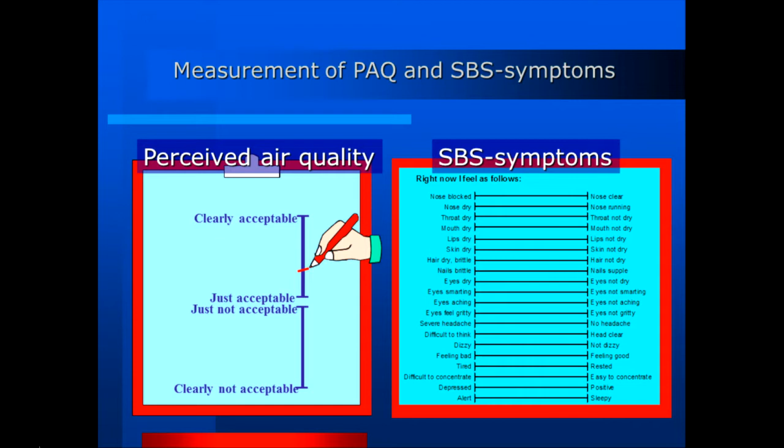These are not measurements, except that we measure their response in millimeters on a scale, but they are a response, it's behavior, and they are not normally distributed. For example, if you have a headache, you may have a severe headache or you may have no headache, but we want to know where you are on the scale, and it's not normally distributed. Most people, fortunately, have no headache, so on the frequency diagram we have a lot of people with no headache, very few unfortunate people out here with a severe headache, and in between something like this. It's called a J distribution statistically, and of course you can't use normal statistics based on the normal distribution.

So we use non-parametric statistics, which do not make that assumption, in order to analyze whether the way those scales were marked under condition A differ from the way they were marked under condition B. We are interested in whether there was a significant difference and in what direction it was, but the size of the difference is of course not of particular interest.

Our main focus is on the performance of typical office tasks, because it's difficult to quantify symptoms in money. And money is required in order to improve the indoor environment. It costs money to build a better place. It costs money to bring in more outside air and to control the temperature more exactly. And that money has to come from somewhere.

And if we can show, as we have over and over again, that people work less well in poor environments, then the money comes from the improvement in productivity. In fact, since providing a good indoor environment usually costs about 1% of wage costs of having people actually present doing work, then a 1% improvement in productivity would pay for doubling the budget for providing a good indoor environment.

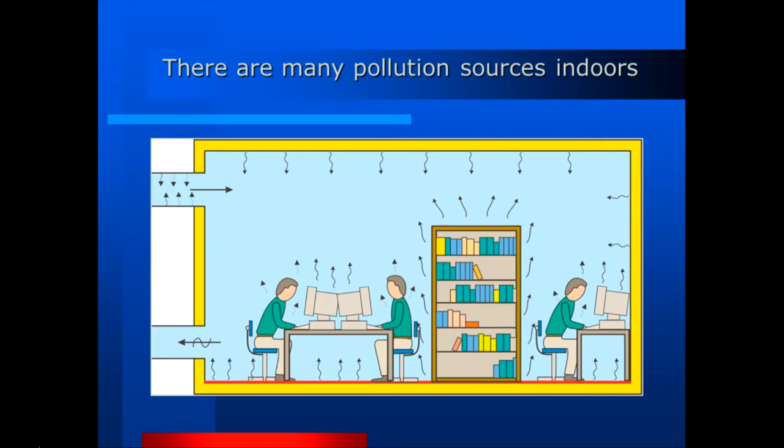We have also indicated that there are pollution sources in the supply system for the air. That's not clean air that comes in there. It was clean before it was taken into the processing, but there's usually a filter there. The purpose of a filter from the point of view of an engineer is to keep his equipment clean. But I've always told people that if you want to breathe clean air, you don't put your face into a vacuum cleaner bag, because that's where the dust is. And yet, all the air that we are breathing indoors has come through such a bag that collects dust. And it does amount to a fair source of pollution.

And therefore, you get something for changing the filter. You get cleaner air. And in this series of experiments, we evaluated how much that means for office work.

In this field laboratory, we had a screen across about a quarter of the floor area, and behind that we could insert various sources of pollution. On a typical control day, there would be nothing behind the screen, but a certain amount, 10 liters per second per person, of fresh air coming in directly through the wall. It hasn't even been through a filter or through the building's ventilation system, so we know it's clean.

On other days, there would be office items behind the screen. The most usual item is an old carpet that has absorbed all of the chemicals that were in an office for a dozen years, and we hang that up in strips. The area of the carpet corresponds to the floor area of the room, and the air that's coming in passes over this carpet before being circulated to the people who are breathing it. And that makes a noticeable difference to the quality of the air.

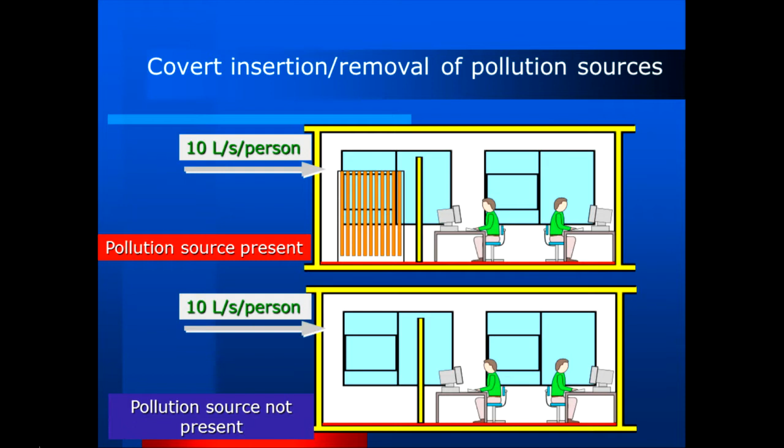10 liters per second per person coming in both cases, either with or without carpet behind the screen. The subjects have no way of telling, apart from sniffing the air, what is behind the screen. They're not allowed to look over it, around it, or under it, and they're of course not informed of what's behind the screen. This is an experiment that could be done in the field. This is, in fact, one of our offices next to our own offices, so it's built exactly as a normal office is, with, in this case, low-emitting materials.

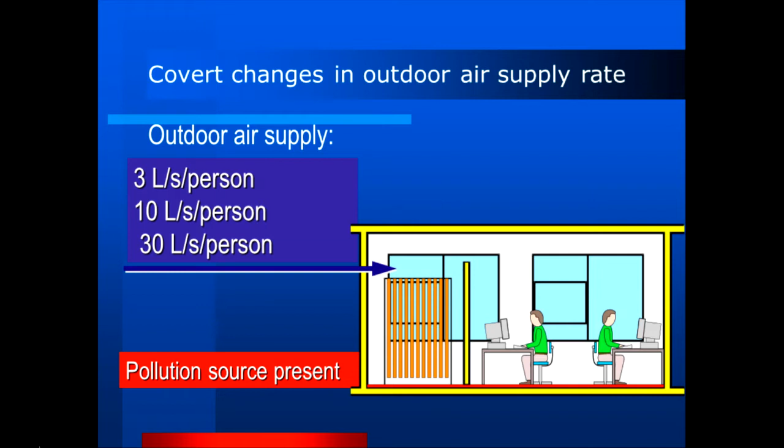We also did an experiment with the source always present, and then we compared 3 liters per second per person with 10 and with 30. In other words, tripling the air supply rate and multiplying it by 10 to see if that helped in a normal office. Bioeffluents are always present, along with a 20-year-old carpet from an office building.

And the first experiment was replicated in Sweden, so independently of ourselves. So we are fairly sure that you would get this result if you did this experiment in your own offices.

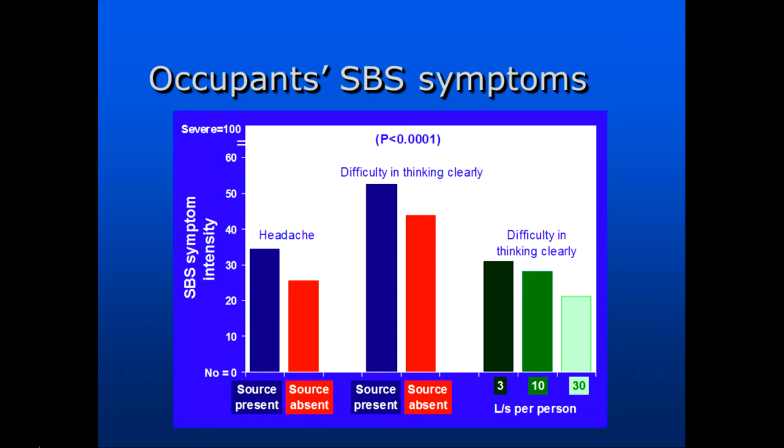So we believe that even these results would be a strong argument for improving the quality of air in offices. But we went further, and the performance, expressed as a relative performance, a percentage change or a proportional change, was significantly affected by the changes with the source absent, source present, and with the source present the whole time by increasing the ventilation rate.

This is another experiment in the series where the source of pollution was electronics. At that time, people were using what I believe today are called fat boy monitors—the big CRT monitors. They have a lot of electronics that gets quite hot, and a lot of air goes through the casing. That's why it has gaps in it. They often have a fan to push in air and blow it out again in your face. And we believed that this was causing pollution.

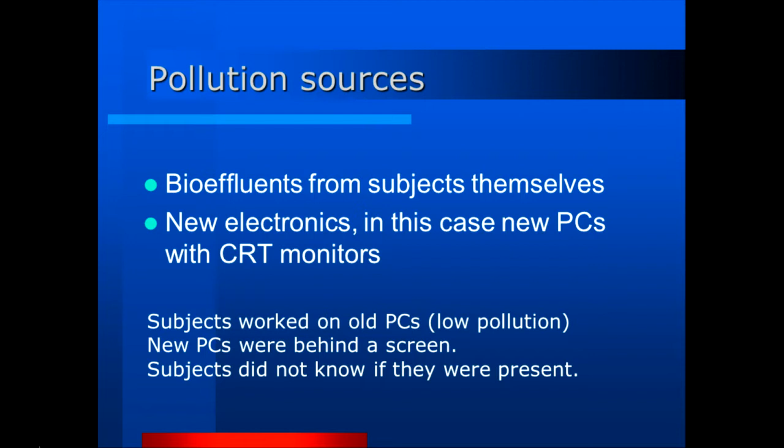But it's only when they're new. So the subjects worked on old PCs so that they were in the control condition, not subject to electronic pollution. Behind the screen, we had new ones, heated up for the first months of use. The subjects didn't know if they were present. So the control condition was like this, with nothing behind the screen and old computers to work on.

And then in the other condition, we brought in 6 new computers and ran them behind the screen. These had been run for less than 500 hours, while the ones they were working on were more than 3 years old and had stopped emitting as much pollution.

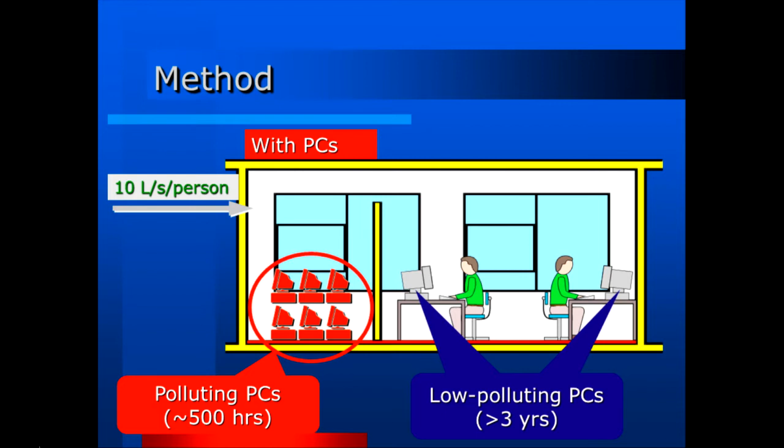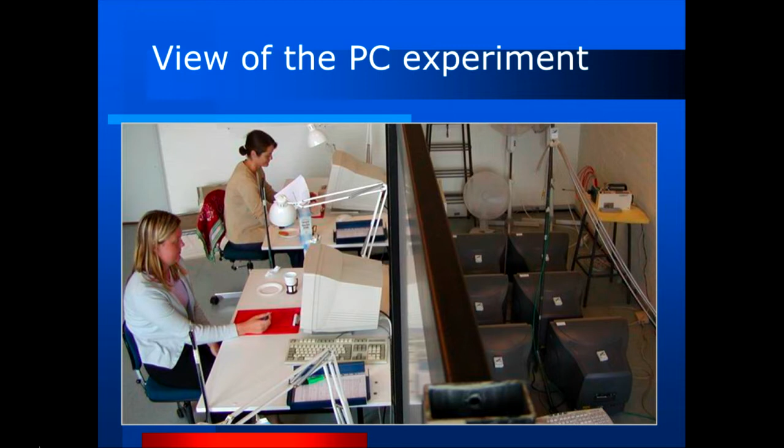This is what it looked like from above—if you were able to climb up near the ceiling, you would be able to see over our screen, and you can see the 6 monitors behind. It's difficult to remember that that's what offices looked like in those days when we did this experiment. This was done in the late 90s, and it was one of the first times that an effect of air quality on office work had ever been shown. Since then, it's been shown by many people all over the world.

That previous one was by visitors, people coming in from outside, and they're notoriously more sensitive to the environment. They haven't been in it for as long, so it meets them in the doorway. And of course, bioeffluents play a part in this too. The occupants got more used to it, but still...

When they rated the air freshness on a scale of 0 to 100, there was a significant difference in how they rated the freshness of the air on one of those visual analog scales.

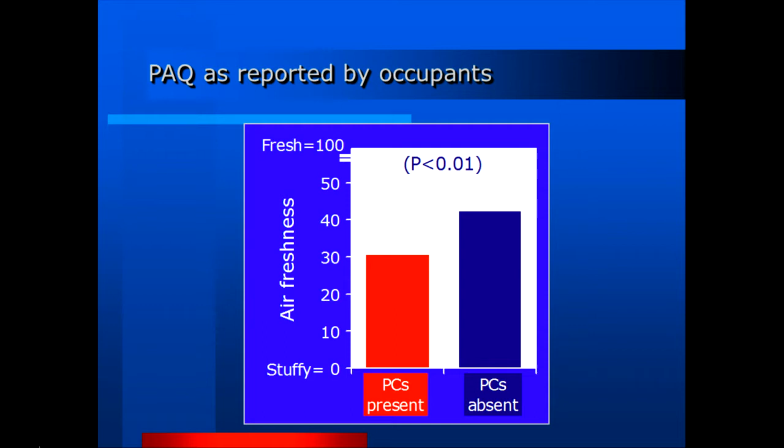Performance, text typing, word processing if you like, was significantly affected by the presence of the PCs. They worked less well when the PCs were running behind the screen.

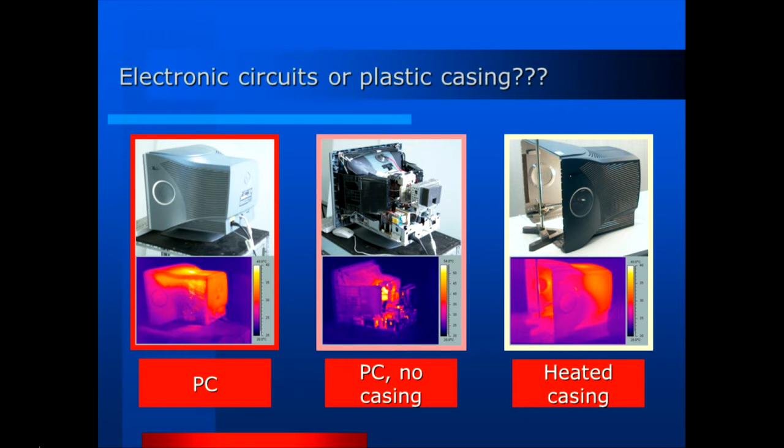Now, was that heated plastic or was it heated electronics? We did a supplementary experiment to show that. On the left, you see the whole PC. In the second, we'd taken the casing away, and it was only the electronics. The third sample from the left shows just heating the casing, and that was no more than the background. So it wasn't the casing, it was the electronics.

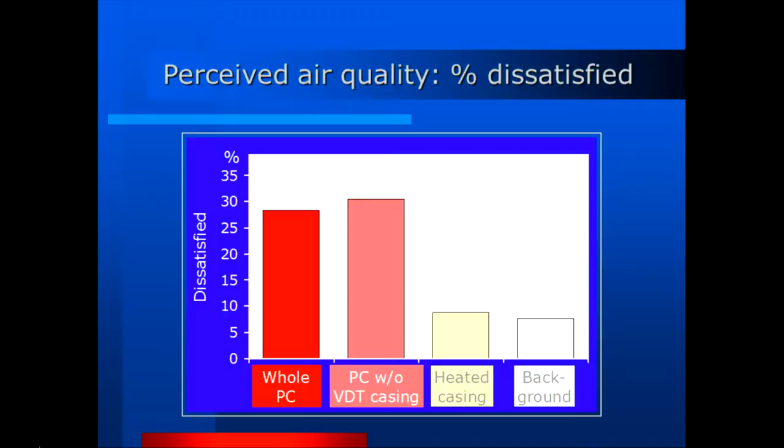We think it's the flame retardants on new electronics that, when heated, give off a lot of unpleasant chemicals that reduce the quality of the air. This is an experiment we thought would lead to a new industry of point exhaust from the casings of electronics.

I still think that would be a good idea for printers and copiers, because they still give off a lot of pollution. But nowadays we work on flat screens, and it turns out that they do not provide that amount of pollution, but other electronics do.

If we express our results in relative performance as a function of liters per second per olf, that is person equivalent. In other words, we have quantified the carpet in terms of equivalent number of people. That's a somewhat controversial way of dealing with all the different pollutants, but it works from an engineering point of view.

In terms of how much fresh air we need to bring in for each olf in the source strength, we see a typical curve like this, where the first improvement from 1 to 2 to 3 has an enormous effect on performance. It doesn't level off entirely, but you continue to get improvement up to at least 10 liters per second.

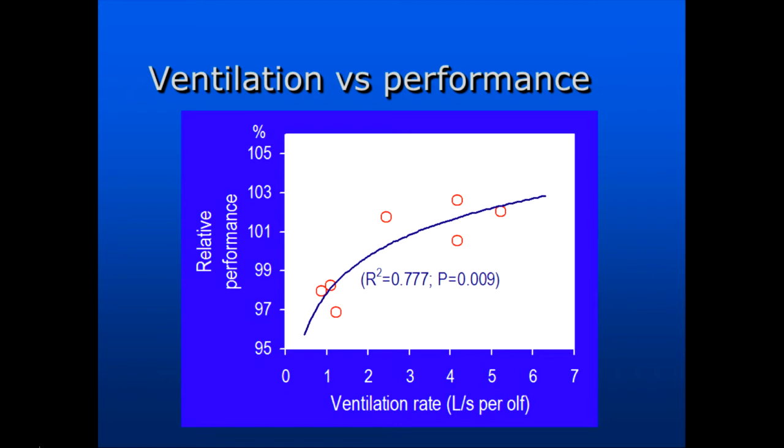If we express relative performance as a function of percent dissatisfied with air quality, that is an empirical quantity you can discover by going around asking 100 people, or dealing out questionnaires electronically or on paper, to find out how many are satisfied or dissatisfied, or even better, using the DTU scale of acceptability.

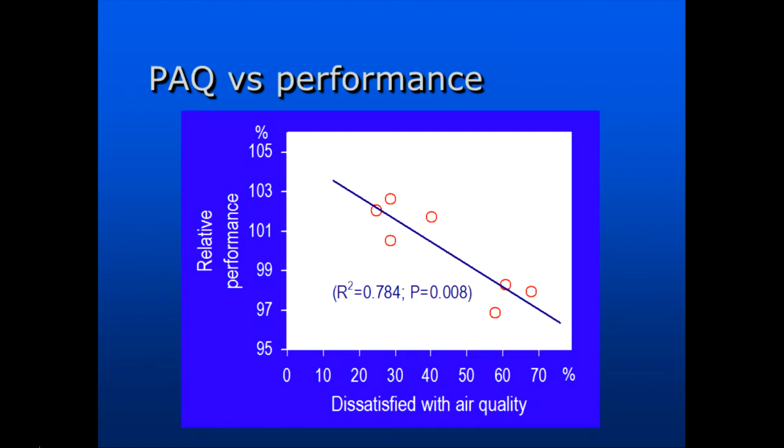You can use this relationship to work out what percentage decrease in performance you would get as you move up towards 50, 60, 70% dissatisfied with air quality. So you can turn data quantified only in terms of people's subjective responses into an estimate of performance, which can in turn be recalculated in dollars for a particular workplace.

The air that we bring into the field laboratory, or this lecture theatre, or your office, mixes with the other air in the room. There are various ways of getting it to the breathing zone more efficiently, for example by displacement ventilation.

The air comes in low down and rises with your self-convective current, reaching your nose in slightly better shape than if it had been pre-mixed with all the air in the room and emissions from other people. But the best we can do, short of giving people a mask to breathe as fighter pilots have, is to bring the air all the way to their desk and let them breathe it exactly as they would in their car, with a vent they can position where they like.

And here's a very early, rather crude example of a personalized ventilation system, which delivers supply air more efficiently directly to the breathing zone.

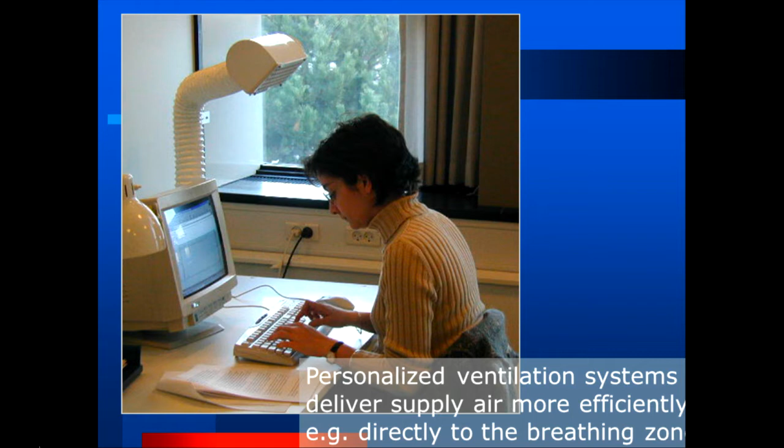My colleague Arsen Melikov is a pioneer in this area and has developed many better ways than this of delivering air directly to the breathing zone.

But all I'm going to say today is that in an experiment he ran, sick building syndrome symptom intensity was reduced by providing personalized air as opposed to not providing it, providing the same air but through the normal ventilation system. The subjects were able to adjust the flow rate and position individually.

That greatly increases the between-subject variance, so it makes it even more difficult to show effects on performance, because there are other sources of variance. It doesn't mean the effect is less, it just means the variance is greater, so it's more difficult to show an effect because of the variance between people.

But even with that disadvantage, by allowing them to adjust it themselves, perceived air quality and the performance of office work was significantly improved in a 26-degree office with 20-degree supply air to such a PV system.

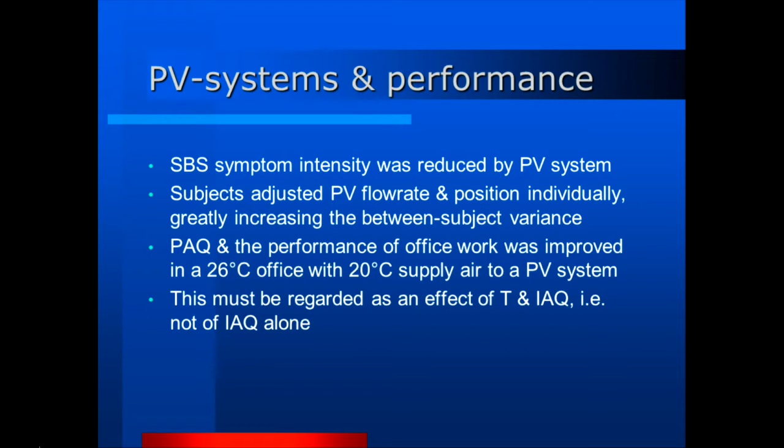However, this must be regarded as an effect of both temperature and indoor air quality, because they were able to cool themselves with this blower as well as provide better air. So it's not an effect of indoor air quality alone, but it does show an advantage of the PV system for performance.

Well, people who don't want to spend the money on bringing in more air say, all that's very well, it's done in a laboratory. These are subjects who know they're taking part in an experiment. They're paid to take part in an experiment. It wouldn't work in practice, and that's where we are having to pay to bring in more air.

So we took the consequences of this criticism. It's a fair criticism of our work. And we did the same experiments, or similar experiments, in the field.

This is a picture of the actual call center where the experiment was done. It was a directory inquiries call center where each operator, there were 24 of them at different workstations, were working with an intelligent search system with a computer under time pressure, and time pressure that you can't imagine. Each one of those was expected to deal with 400 calls an hour, not per day, 400 calls an hour.

In which they had to find out what the caller wanted and deliver it to them as quickly as possible. A measure of their ability to do that was how long it took them before they could say thank you and goodbye and go on to the next caller in the stack of calls waiting for them and exerting time pressure upon them. This really is hard work. It's not like you or I who can take a break or flick to CNN or something if we find we're not concentrating very well and then go back to work. They have to keep taking calls and their work is monitored.

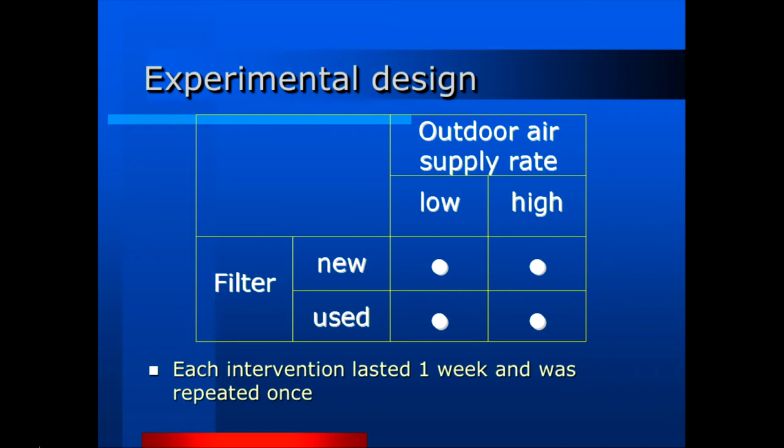The beauty of this is that it was a blind experiment. The subjects had no way of knowing if we had changed the filter that day or that week. And they had no way of knowing if we were giving them a lot of fresh air or a little. They couldn't even tell by seeing how much air was coming in, because it was always the same amount of air. What we did was mix in a little or a lot of fresh air into the recirculated air that was coming in, rejecting more or less of the exhaust air.

So from a behavioral point of view, this is the perfect experiment. People are in their normal working environment, they're doing their normal work, it's real work for which they're paid, it's difficult work, it's hard work, and they are completely unaware of the conditions that we've made for them.

You say, well, why didn't we change the temperature? Well, we did try to do that a little, and people were knocking on the plant room door immediately. The moment we changed the temperature, even by half a degree, they complained, because they were very sensitive to temperature. So this is not a thermal experiment. We gave them the temperatures they were used to and which they demanded, and all we did was change the air quality.

Each intervention lasted a week and was repeated once. We changed the outdoor air supply rate by changing the dampers in the existing system from 34 litres per second to 344 litres per second total. And that is from 8% to 80% of the total flow rate of 430 litres per second into that room.

That ventilation rate corresponds to 3.5 air changes per hour. That is 7 times what you get in a building, a dwelling that is built according to most countries' norms. So it was well ventilated. And we gave them 8% fresh air or 80% fresh air. That corresponds to going from 2.5 litres per second per person to 25 - a 10 times improvement in the proportion of fresh air.

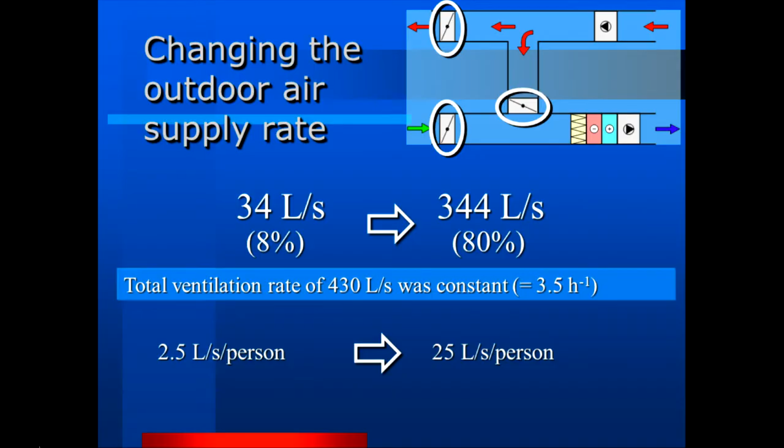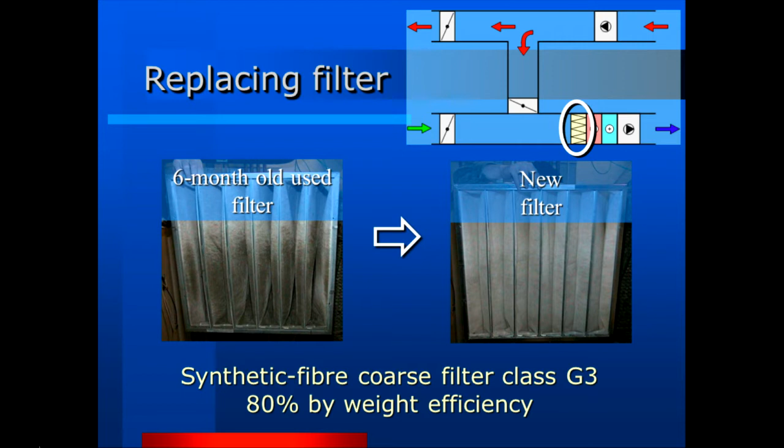And we changed the filter. You can see its position in the system. It filters both the incoming air from outside and the return air taken from the exhaust vents. And we either had a new filter or a 6-month-old used filter loaded with dust. And it was the same dust because it had been used in that office. So nothing unusual about the conditions, it's just different phases of the filter changing cycle.

Average talk time with a new filter in place was significantly, or almost significantly, changed when we gave them 25 litres per second instead of 2.5. P less than 0.06 is borderline significant. It was a 6% decrease in the talk time, the time it took to answer callers' questions.

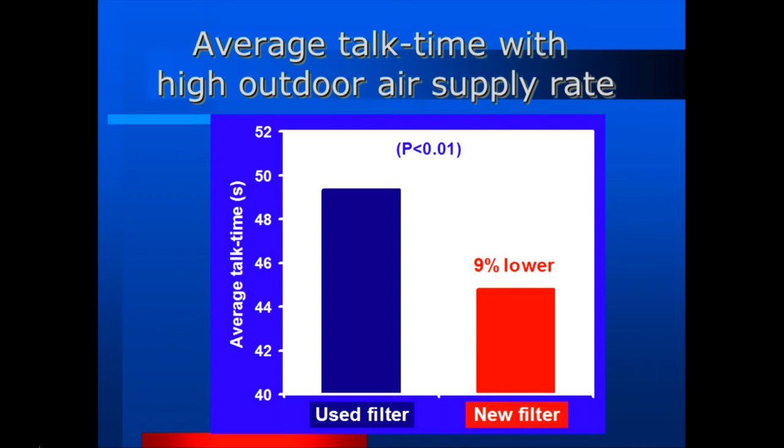The average talk time with a high outdoor air supply rate was decreased by 9% when we put a new filter in place compared to the old filter. But when we changed the supply rate with a used filter in place, giving them more air through it actually made things worse. Their talk time was 8% higher with more air going through it. And how can that be?

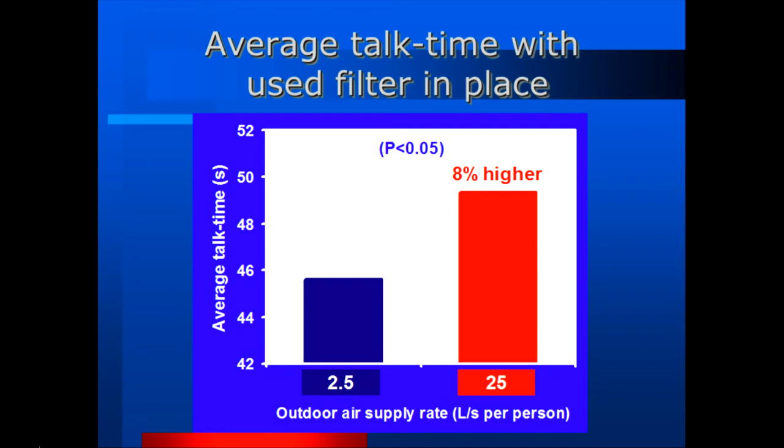The size of the effect on performance was 6 to 9%, similar in both field and laboratory experiments. Increasing the outdoor air supply rate had positive effects when the filter was clean, but providing more outside air through a used filter had negative effects.

We think that's because a filter contains a huge surface area of dust. Charlie Weschler has calculated that a full filter, just before it's changed, has a dust surface area corresponding to the whole floor area, the whole ceiling area, plus all of the walls. It's as if you walked into a room entirely covered in dust. You've probably never seen such a room, and you wouldn't want to be there. Yet the air we breathe has been passing over an area of dust that large.

I've always said it's better to breathe air before it goes into the vacuum cleaner than after it's been through the vacuum cleaner, and you should try it one day. When the air has been passed through the dust collected in your house, it's not very nice to breathe. In fact, you may get a coughing fit from breathing it. And this is what happened here.

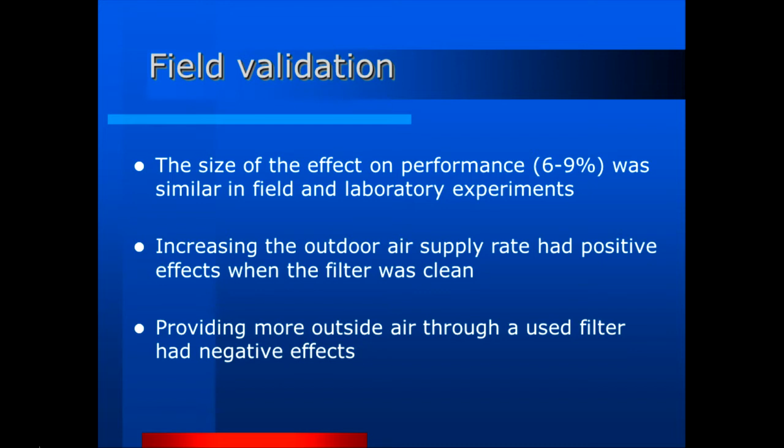We believe the negative effect of passing more outside air through the dust was that the substances on the dust - this is just speculation - were more easily able to evaporate when air with a lower partial pressure was passed over them. So it was transporting more pollutants, which had accumulated over the years or months that the filter had been in use, back into the office all at once.

This is a slide I shall show three times. I have addressed only the first bullet point and its conclusions from this lecture, which I hope you'll share after listening to me for an hour. The first conclusion is that office work is performed more slowly in poor air quality - shall we say CO2 levels above 900 ppm in a typical office. The other conclusions we'll look at the evidence for, and I shall show them in bold as I believe I've justified them.

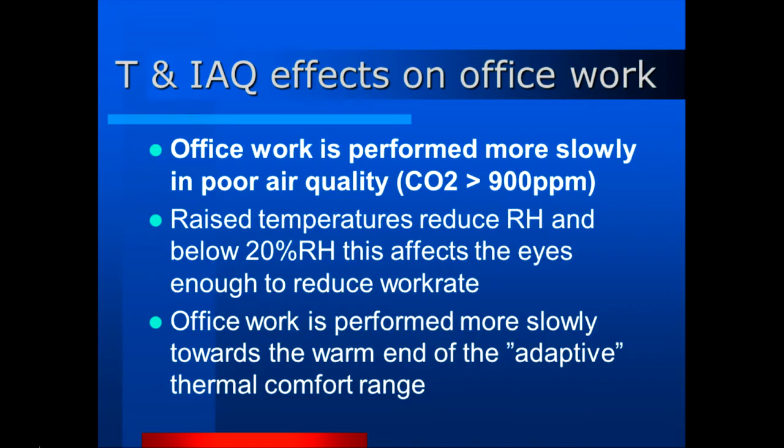I now move on to a second series of experiments, paid for by ASHRAE in this case, known as Research Project 1160. It was to determine limiting criteria for human exposure to low winter humidity indoors - a problem shared with Canada, Russia, and several northern US states. I'm sure parts of China have low winter humidity too, even though we think of China as having high humidity - there are cold areas there, as well as in Northern Ireland and Japan. It can be very dry indoors in the winter.

This was published in the HVAC&R Research Journal, ASHRAE's archival journal, in 2006, and I was one of the project leaders in this series of experiments. We took 60 subjects, male and female, including normal, sensitive, and contact lens wearers, and they performed simulated office work again during 300-minute, 5-hour exposures - text typing, proofreading, and addition, which we've already talked about.

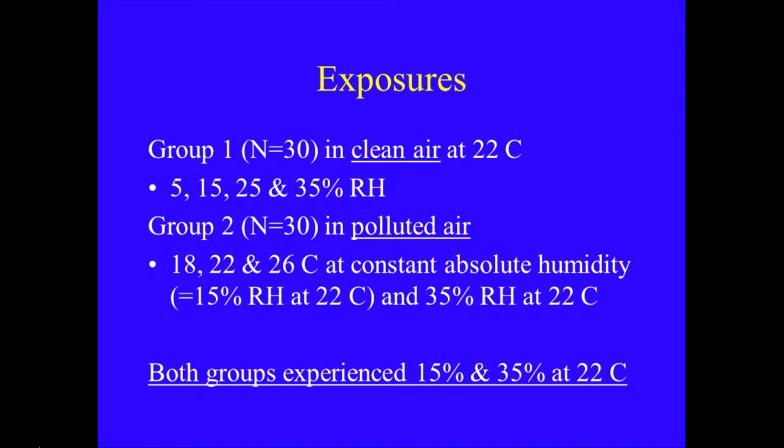The exposures consisted, for Group 1, of 4 levels of relative humidity, all taking place in clean air at 22 degrees: 5%, which is very dry, 15%, normally dry for northern regions in winter, 25%, and 35% relative humidity. So if there is an effect of humidity, we're exaggerating it by going all the way down to 5%. Group 2 experienced polluted air at 3 different temperatures, with constant absolute humidity corresponding to 15% relative at 22 degrees - fairly dry air at 22, even drier at 26, not so dry at 18.

We were interested in the effects of temperature on the same symptoms as the effects of dry air. They also experienced a control condition of 35% relative at 22. Both groups experienced 15% and 35% at 22 degrees, so we had the full group of 60 available for that comparison.

To cut a long story short, because my lecture today is about the effects on office work, we did a lot of objective measurements, as sophisticated as we could with medical students doing them, of the effects on the eyes, skin, and nose. There were significant effects of relative humidity on the skin and eyes, but they were small - of no clinical significance whatsoever - and there were no discernible effects on the nose at all.

Now, that probably doesn't tally with your experience of flying in an aircraft, where everybody knows humidity is very low, because it's minus 50 outside the aircraft and the air is brought in and heated, so it becomes extremely dry in an aircraft. Most people think it's because of the altitude and the pressure, which it isn't.

That has been shown in experiments performed in a very sophisticated hypobaric chamber in Germany. They blame the low humidity. We've shown that it isn't that. In simulated aircraft environments in our laboratories, we have in a series of experiments shown conclusively that almost all of the symptoms you experience in aircraft are due to ozone reacting with skin oils and creating short-lived, very aggressive aldehydes which attack the eyes and other mucous membranes.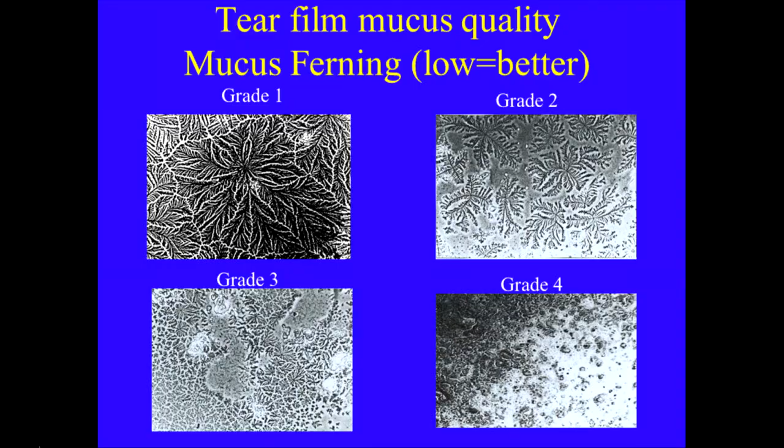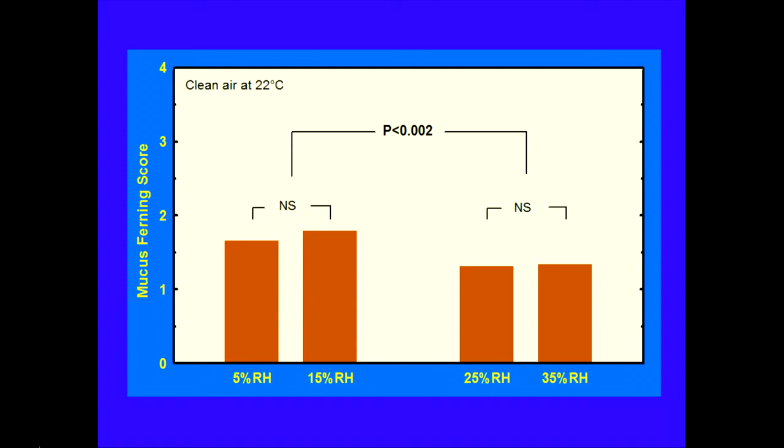The mucus ferning score, taken on average over 60 people, or 30 people in the group 1 case, shows how the mucus ferning quality was at the 4 different levels of relative humidity at 22 degrees. There was a highly statistically significant decrease in mucus ferning quality. The high score means poor quality. As we passed the magic level of 20%, both conditions below 20% relative caused a measurable increase in mucus ferning score, whereas 25 and 35 percent, which many people also believe are fairly dry, and for people living in the tropics extremely dry, showed no difference between each other.

And then in group 2, who experienced 3 different temperatures, we could produce the same increase in mucus ferning score, in other words decrease in the quality of the eye mucus, by raising the temperature above 22 degrees. There's a statistically significant difference between 22 and 26 degrees at the same absolute humidity of 2.4 grams per kilo of air, corresponding to 15% at 22 degrees. So the conclusion is that if we have problems with our eyes in low humidity, we should drop the temperature to compensate for that.

Low relative humidity had a negative effect at 22 degrees in clean air. It was worse at 5 and 15 than at 25 and 35, as you saw in the staples. Raised temperature had a negative effect in polluted air, worse at 26 than at 22 or 18. Again, all of these effects were statistically significant.

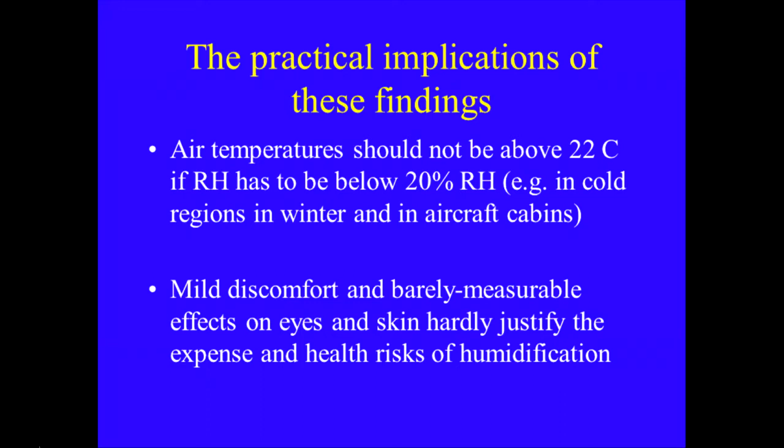The practical implications of these findings are that air temperature should not be above 22 degrees if relative humidity has to be below 20. In other words, for example, in cold regions in winter and in aircraft cabins. But there's only mild discomfort and barely measurable effects on eyes and skin, and these hardly justify the expense and health risks of humidification.

These have been well documented, I'm not going to go into them. If you raise the humidity in cold conditions, you get condensation in places that are hard to reach and are difficult to heat, and that can lead to mold growth and an enormous decrease in the quality of the air, even to health problems as a result of water damage.

So we try to avoid humidifying in the northern part of Sweden, and we compensate by lowering the temperature indoors instead in winter and asking people to wear slightly thicker clothing to compensate for that.

In this experiment, the subjects worked at 3 tests, 3 examples of office work. We had included that only to ensure that they didn't sleep, because one of the ways people deal with the aircraft cabin environment is to shut their eyes. If they are experiencing slightly sore eyes, they can deal with that by shutting their eyes as they take a long flight across the Atlantic, for example.

So we wanted them to make sure that they kept their eyes open for 5 hours. And the best way to do that was to get them to look at screens.

So nobody expected low humidity to have an effect on performance. It's never been shown before. But we found apparently significant effects. I say apparently, because this is one single observation, and we have not yet got round to repeating it, and nobody else has either, as far as I know.

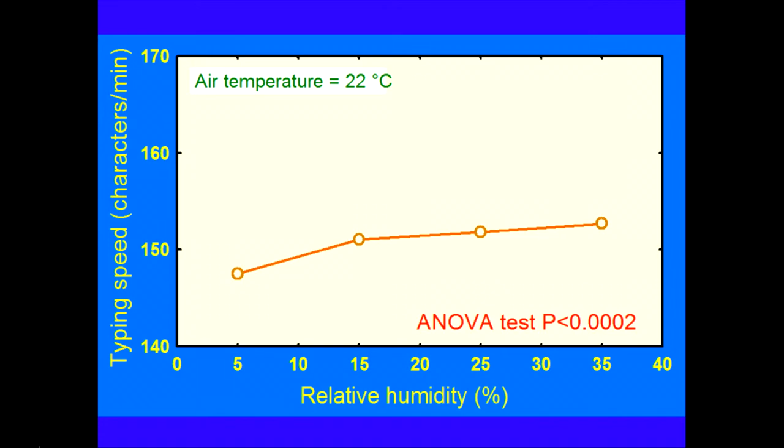What we observed was that as we reduced the humidity at 22 degrees from 35 down to 5, we saw a statistically significant decrease in typing speed. It's quite a large effect, and it is extremely significant. 5 hours of work gives you high levels of significance.

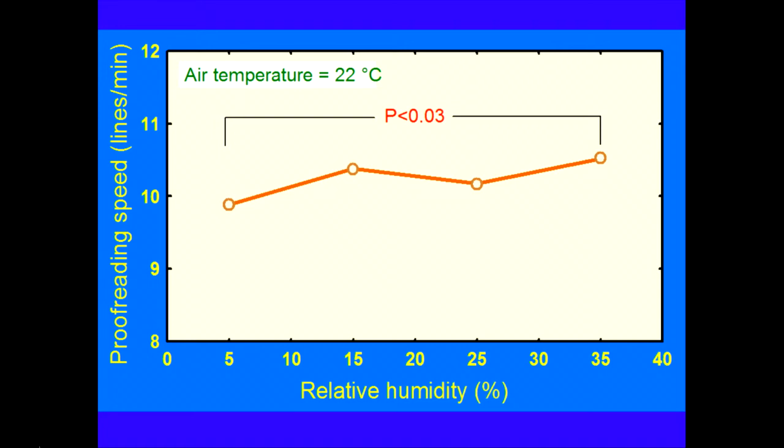On proofreading, there was also a statistically significant negative effect of low humidity. And on the number of additions performed per minute, there was a sharp decrease as we went down to the lowest level of humidity. Again, unbelievable levels of significance. So these are not chance observations.

It was a well-designed experiment with balanced order of exposure. It can't be put down to some defect in the design of the experiment. We look forward to having these results confirmed in other experiments.

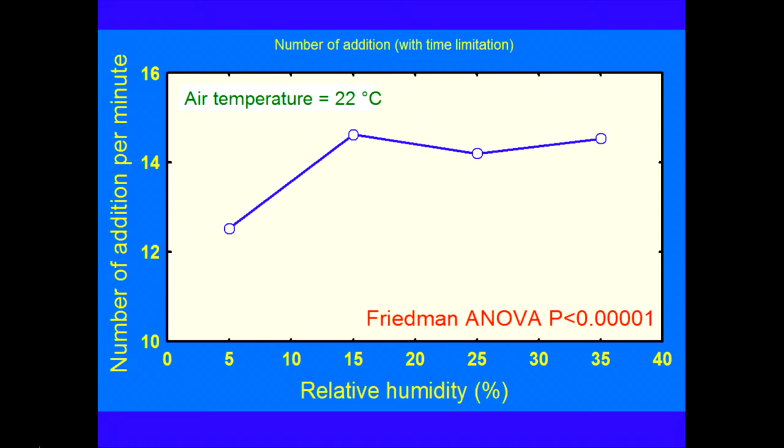If they are confirmed, they might justify humidification, or at least a rather drastic decrease in indoor temperatures using the mechanism that we've just documented. And that would be bad news for energy conservation, because humidifying takes a lot of energy.

The possible mechanisms for a performance effect of low relative humidity - you don't just have to show that they occur, you have to give some idea as to why they could occur. We have 3 theories as to why they might occur. The first, we don't think is very likely.

Discomfort distracts attention. Well, there was very little discomfort. We were following how much discomfort there was, and it was low because they were able to increase the blink rate. But this compensatory mechanism of increased blinking may reduce the visual data acquisition rate.

In other words, your attention is on hold during each blink. You're not aware of it, but it's logically so that when your eyelids are down, you can't see anything. So your rate of acquiring data is on hold during each blink. The brain is so well constructed that it maintains your vision, so you think you're seeing things continuously, but you're not.

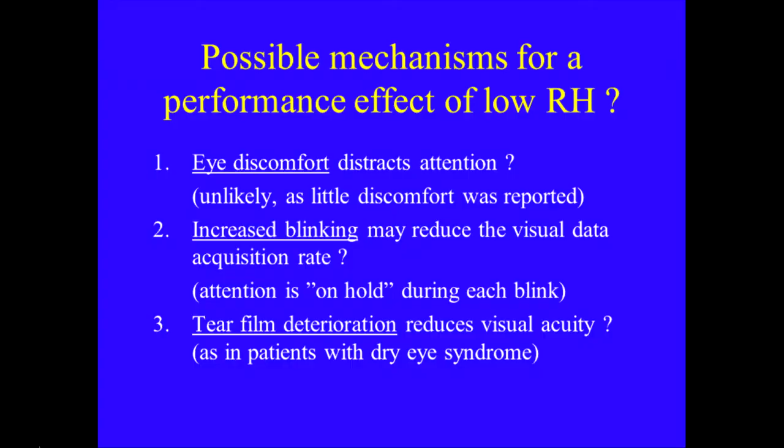You can miss things that happen. Particularly on a computer, where things are changing all the time, you may miss something and have to go back if you happen to blink at the critical moment when the screen changed. So we think that it may simply be that low humidity causes increased blinking. We've documented that.

And you therefore have to work more slowly in order to acquire and process the same amount of information per minute. There is another possibility: we know that tear film deterioration reduces visual acuity, and it may take slightly longer to focus on the screen when you have drier eyes, as we know it does with patients with dry eye syndrome, where they have clinically dry eyes because they're not producing enough tear film or they're producing a poor quality of mucus.

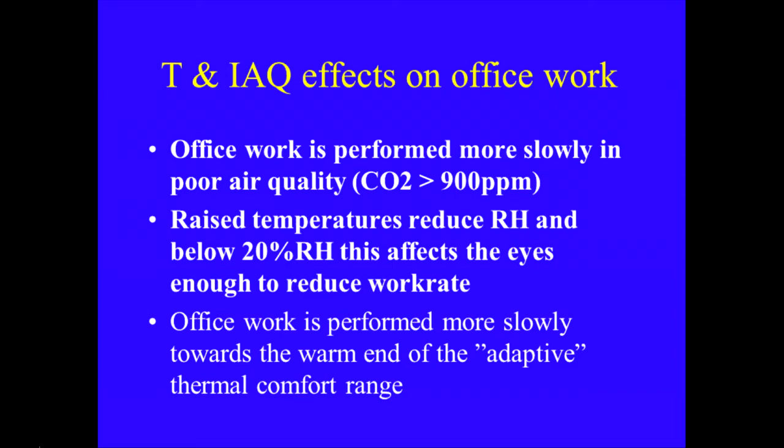So we come back to the conclusion screen. I've now placed bullet point 2 in bold: raised temperatures reduce relative humidity, and below 20%, this affects the eyes enough to reduce work rate. That's what we can conclude from Research Project 1160, which you can obtain from ASHRAE and read for yourself, or read in our shortened version of the final report in HVAC&R Research Journal.

I'm now going to go over to experiments on temperature. Exceptionally, I'm going to show you an experiment that I did not perform. At the time this experiment was performed by Pepler and Warner, I was doing experiments here in Sweden on children, which I mentioned, at least I've done many more since, but which I mentioned in my previous webinar. That was done in 1967 and reported in 1967. Pepler and Warner reported their results in 1968, and it was only then that I became aware of their experiment.

It was an early climate chamber experiment on office work, and it covered the range 17 to 33 degrees. That's most unusual, because from a practical point of view, we know people won't put up with 17-degree or 33-degree temperatures in offices nowadays. We're used to a higher level of thermal control.

But Pepler and Warner got 72 subjects, equal numbers of male and female, divided them into 6 groups, and had them work through a textbook week after week, which contained a series of questions and answers after each section. So they were able to see how quickly they worked and how many errors they made in answering the questions. It was done with paper and pencil because we didn't have computers in 1968. Some of you probably weren't even around at that time, but all of our experiments were done with paper and pencil at that time. 6 temperature conditions were experienced in balanced order, 3-hour exposures.

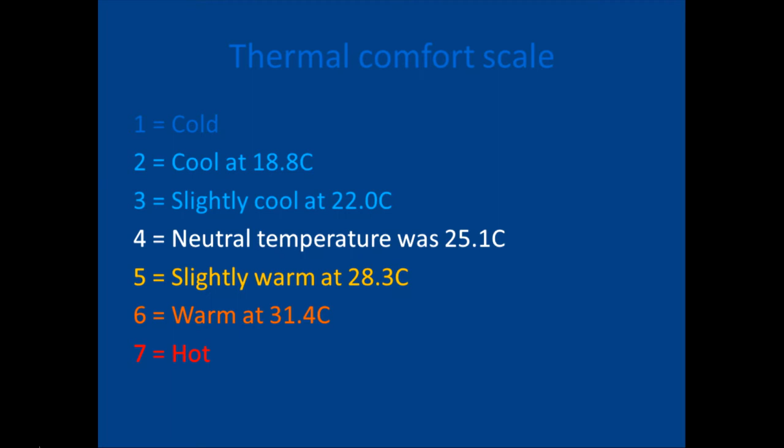You wouldn't get many people nowadays to work at 19 degrees, sitting still for that many hours. Slightly warm at 28—again today, most people would say it's hot at 28 degrees, people in this part of the world anyway—and warm at 31 degrees. A very tolerant subjective response to temperature.

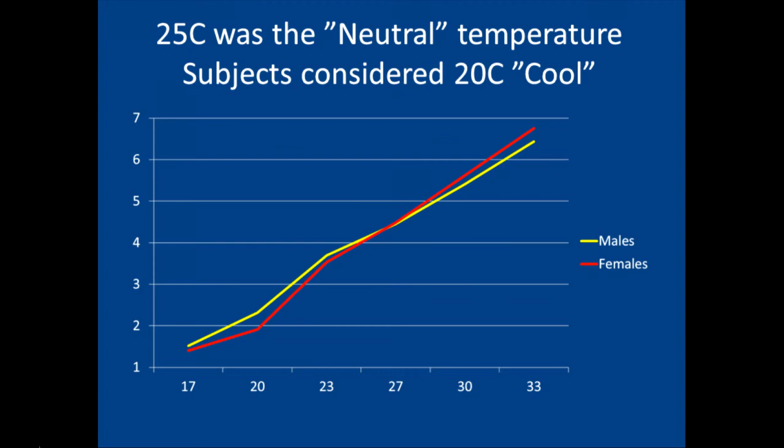It looks like this graphically. It's the same data that I've shown there, I was just averaging. You can see a very small tendency for women to consider it hotter than men do at the top end, and colder than men consider it at the lower end. But it's absolutely negligible difference when they are in standard clothing.

Normally we find that's the case. The systematic difference in practice between men and women is that women have clothing in which the insulation is less effectively distributed over the body area. They show more skin—legs that are bare, arms that are often bare—when men don't, and so they are more sensitive to cold and heat. In this case, they weren't: they considered 20 degrees cool, and 25 was a neutral temperature.

If we go to comparing now with present-day norms for temperature, ASHRAE would tell us, using the adaptive thermal comfort model, that 80% will be comfortable in the range of 18.5 to 25 degrees. Now, anyone running a building knows that's not entirely true. You will get very determined opposition to running an office at 18.5 degrees, and also to running it at 25. But that's the norm today—supposed to be okay, 80% comfortable in that range.

And the European corresponding norm is from 19.5 to 26.5. Now, these ranges are, in my view, biased in order to save energy. People don't actually want to work within, at the edges of these ranges.

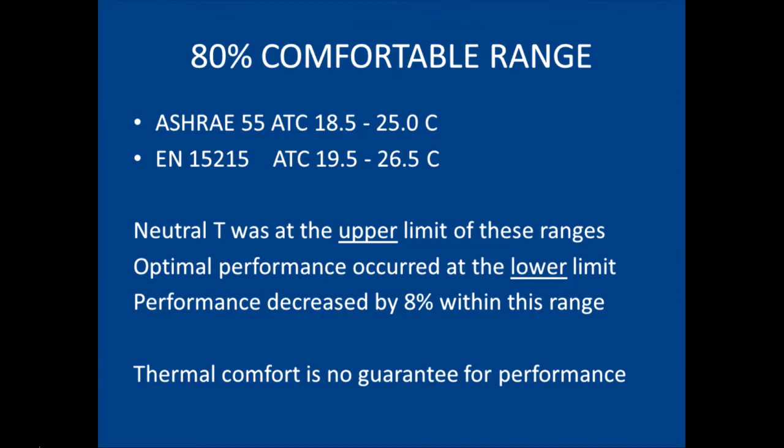Thermal comfort is no guarantee for performance. Just because 80% accept it doesn't mean they're all working as well. They maintain thermal comfort by working more slowly, reducing their metabolic rate, which leads to a reduction in effort and a reduction in performance.

Having looked at Pepler and Warner's excellent experiment, I'm going to go on to some of DTU's experiments, carried out by colleagues Balazova and Clausen, in which I had a part. We performed an experiment to show how multiple indoor environmental quality factors affect office work. This was shown in a conference paper to Clima 2007.

We took 56 subjects, nearly equal numbers of men and women, 24 years old. They performed office work, addition, for 3 hours. Really boring, quite hard work. They did 15 minutes of work in each of 8 stated conditions, and all 8 conditions commonly occur in offices.

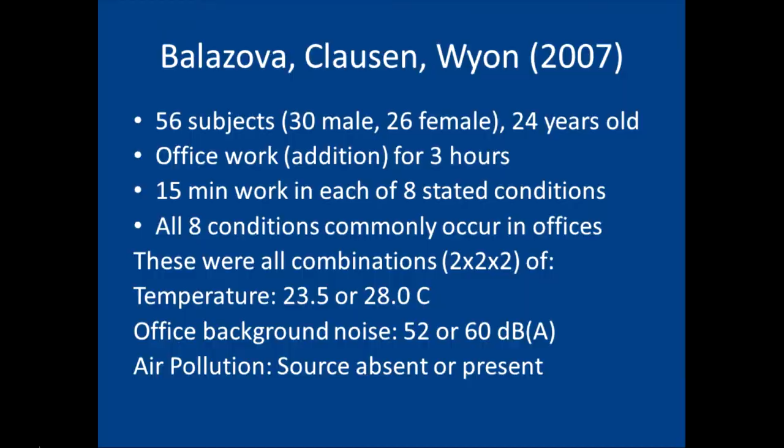The conditions were combinations, 2 by 2 by 2, of 2 temperatures, 2 office background noise levels, and 2 air pollution levels. The temperature was either 23.5, not cold but not warm either, or 28, quite warm but not hot. The office background noise was either just background noise, or recorded office noise making it seem as if you were in an open office with a lot of people present, machines working, telephones ringing and so on—quite distracting office background noise—or a private office. The air pollution was either with a source absent, or present behind a screen, the carpet we've used in previous experiments.

The work rate under the 4 conditions shown here was significantly decreased by multiple factors. The reference was cool, quiet, and clean: 23.5, private office, no pollution source present other than themselves. That is the left-hand condition. When we made it warm and noisy, 28 degrees with other people present behind the screen and recorded noise, we got a significant decrease in work rate.

When we made it warm and polluted—28 degrees with the carpet present as a source of pollution—we got a slight decrease too, also statistically significant. And when all 3 factors were present, warm, noisy, and polluted, we got a highly significant decrease in performance, even on a 15-minute exposure to each condition.

We didn't expect to get statistically significant results. We were more interested in the subjective results. But it's very gratifying that even in such short exposures, we can show that indoor environmental quality has such a systematic effect. These are not additive effects.

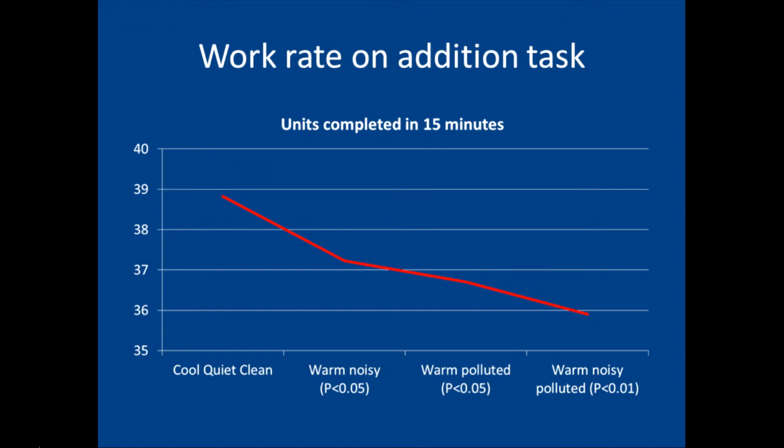We're not getting a decrease that is double, but they are additive—though not exactly quantitatively additive. Measured work rate decreased by up to 8%. You're starting to recognize that magnitude from our other experiments. Each indoor environmental quality factor had some negative effect, but the combined effects were less than strictly additive.

Self-estimated performance was much more affected than measured performance. We'll show you that in a minute. Every single factor decreased self-estimated performance. In other words, they thought they were working less well even when they weren't.

We can also draw the conclusion that cool, quiet, and clean offices will pay for themselves. 8% is a lot of money if you work that out in terms of the wage bill.

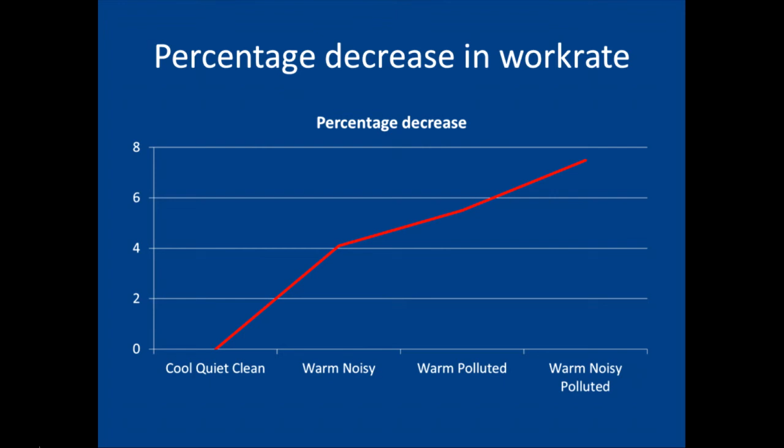Now expressed as a percentage decrease in work rate, the same 4 conditions—warm noisy, warm polluted, and warm noisy polluted—we can see an 8% decrease in work rate.

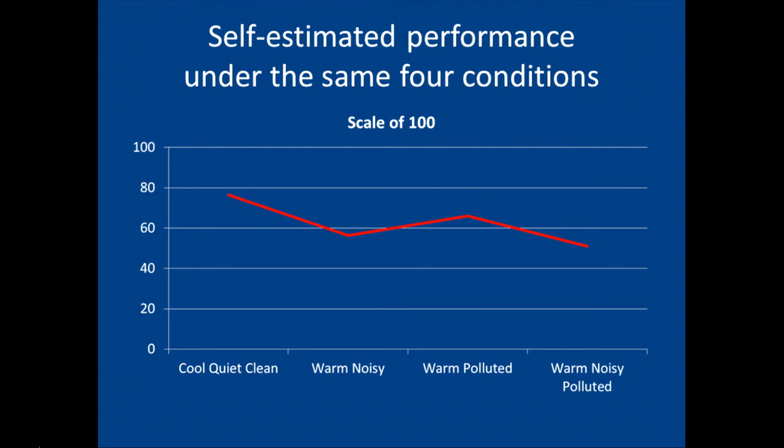If we look at self-estimated performance, it's decreased significantly under each of those conditions, and it's a much bigger decrease. It goes from 80% of maximum down to below 60 in some cases. That's much more than an 8% decrease. So you can't rely on self-estimated performance to give you a quantitative estimate of how much more slowly people are working.

Under the same 4 conditions, the percentage decrease was between 20 and 30%, as you can see here, going from cool, quiet, clean to warm noisy, warm polluted, and warm noisy polluted.

In this case, warm noisy was seen as worse than warm polluted, but it wasn't—they were about the same in terms of actual decrease of performance. But it more or less parallels the effects we could measure objectively in terms of the amount of work they did.

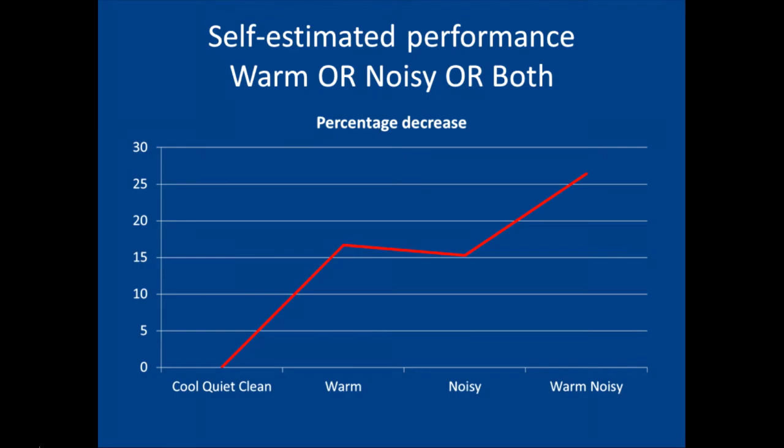Now I want to show you warm by itself and noisy by itself. These were not significant by themselves, but warm and noisy together were, as you've seen. They at least occur systematically where you'd expect them to occur, between cool, quiet, clean and warm, noisy. But again, I emphasize these were not significantly worse than cool, quiet, and clean when they occurred separately.

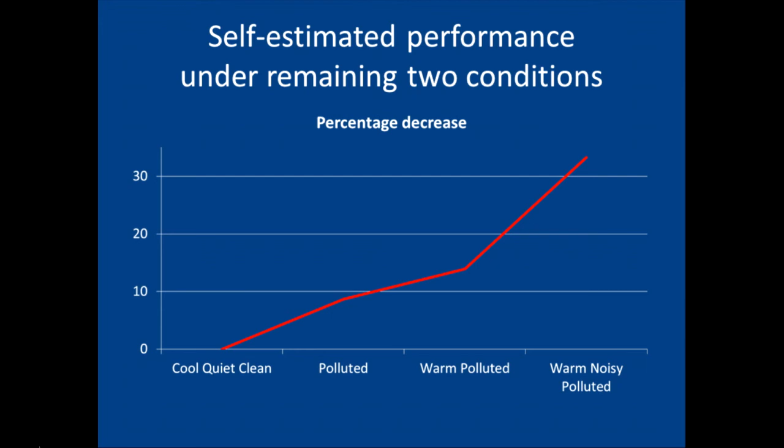And the remaining two conditions, polluted and warm, polluted, again occurred in between what you'd expect, the cool, quiet, clean condition, and the warm, noisy, polluted condition that we know differ significantly. They were in between. But again, neither of those conditions on their own produced a significant decrease in performance. But I just want to show you that self-estimated performance did decrease, and that was a significant decrease.

Now, I want to show you a final experiment rather quickly, because we've gone over time. Self-selected improvements in indoor environmental quality. Again, my colleague Georg Clausen was the experimenter, and I had a part in it. We allowed subjects to choose what improvements they wanted in noise, lighting, view out, privacy, temperature, indoor air quality.

And the conditions were to either have a 50% budget for improvements, which they either did or did not choose, or to experience none of the improvements or 100% of the budget. In other words, all of the improvements. Usual versus improved indoor environmental quality.

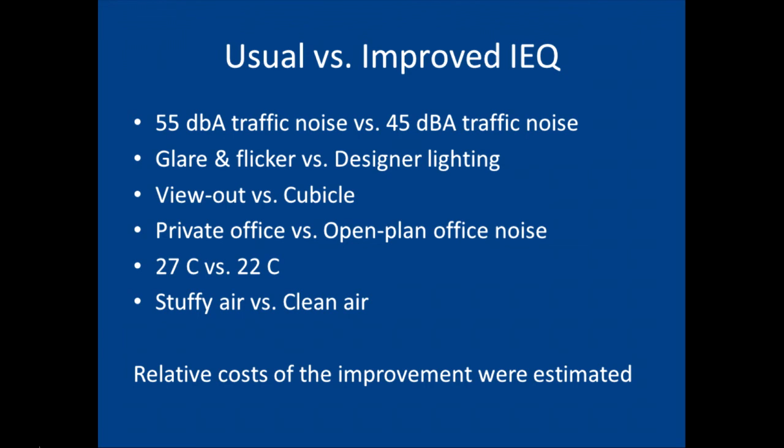Each of these 6 IEQ factors took 2 levels. 55 dBA traffic noise versus 45, in other words, better insulating windows. Glare and flicker versus designer lighting, really good lighting. View out versus working in a cubicle. A private office versus the noise of an open plan office, recorded of course. 27 versus 22. And stuffy air versus clean air. In other words, the pollution source present behind a screen or not.

And the relative costs of the improvements were estimated by consultants, and we then allowed one group to choose. 99 subjects were randomized to 4 conditions, so there were 4 groups. One group worked with 0 budget, no improvements. Another group at the bottom worked with all of the improvements. In between, we had a group who had been allowed to choose which improvements they could afford. So they were personalized improvements.

Somebody sensitive to noise would choose to reduce the noise level. Somebody who can't stand working in a cubicle would choose the view out, and so on. And then we randomized another group in pairs to experience exactly the same conditions as had been chosen by the other group. So there's enormous variance because they all chose different things. And so we can compare the same conditions that have been either chosen or not chosen by the individual concerned. They worked for 2 hours under one condition only.

The results: one is that all possible combinations were chosen. There was no agreement at all on what was important. Now that should make architects think. We rely on architects and indoor environmental designers to tell us what's important. And they don't know, because it's different for each individual. So we are randomizing people into improvements that we have paid for, even though we don't know that they're the ones they think are important. That's the first conclusion, and that was what we were after. Do they all choose the same improvements after having experienced every one of them?